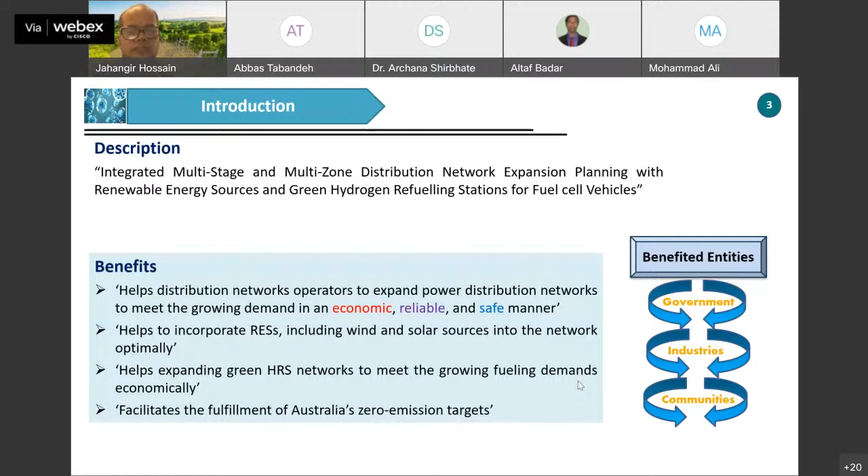For example, in Australia, after coal, the largest share of electricity comes from renewables. Among different types of renewables, wind and solar energy are mostly used in Australia for producing electricity. Therefore, it can be said that Australia is well placed to incorporate renewable energy sources like wind turbines and solar PV systems.

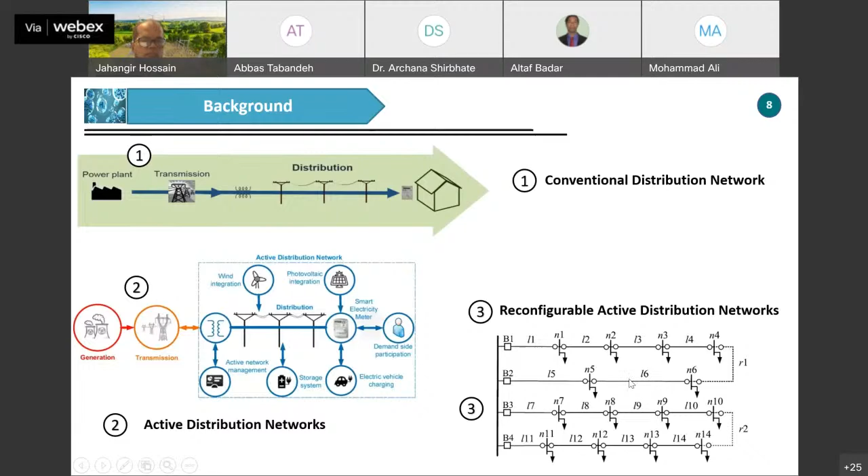Blue hydrogen also is produced by fossil fuels. However, an extra approach called carbon capture and storage technique is utilized to capture the produced carbon dioxide emissions. However, inherently, they are also not free of carbon dioxide emissions.

Recently, green hydrogen has gained much attention these days, and one of the most popular approaches of producing green hydrogen is utilization of water electrolyzers. In this process, which is called water electrolysis, electricity can be used to break the water into hydrogen and oxygen, and then the produced hydrogen can be used for a wide range of applications.

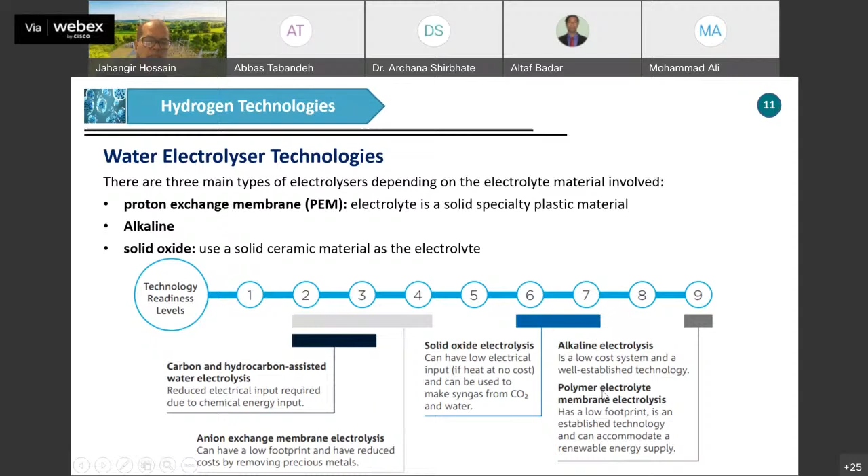If we want to compare these water electrolyzer technologies, alkaline electrolyzers and PEM electrolyzers, we can see here that when it comes to the advantages of alkaline electrolyzers, they have lower capital costs. In fact, they are more mature than PEM electrolyzers. In addition, they are well established.

And when it comes to their disadvantages, they have a larger footprint. Moreover, they have a low pressure hydrogen product.

However, PEM, which has gained much more attention these days in comparison with alkaline electrolyzers, has more advantages because they are very small, flexible, and modular. Moreover, their faster dynamic response can enable them to easily be connected to renewable energy sources. They have higher current density as well as higher purity hydrogen. The only problem is related to their higher capital costs. However, I think with the passage of time, they can mature and their capital costs can decrease.

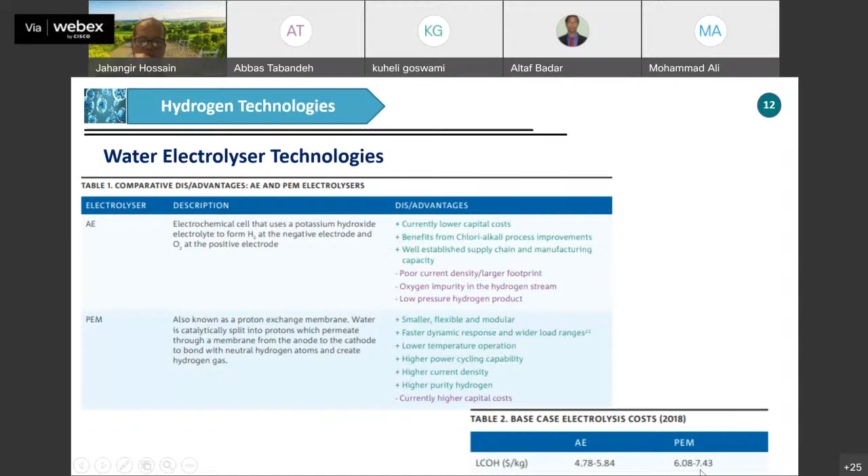In this table, you can see the levelized cost of hydrogen which is produced by these two technologies. You can see that the levelized cost of hydrogen is between 4.78 to 5.84 per kilogram of hydrogen. However, regarding the PEM, its levelized cost is between 6 to 7.50 per kilogram of hydrogen.

After considering the hydrogen production technologies, specifically the water electrolyzer technologies, we need to consider hydrogen storage technologies because they are required to be installed in the system in order to store the produced hydrogen, and then it can be used later during the day. For example, we can produce hydrogen during midnight when the electricity price is very low, and then store it in the hydrogen storage systems. And then during the day, when the demand for hydrogen energy is very high, we can use it.

There are different types of mature technologies related to hydrogen storage. The first one is pressurized hydrogen storage, and it is considered the most common hydrogen storage, and it is used mostly in the network. However, unfortunately, it has lower density, and it needs to be liquefied, or it needs to be pressurized more and more, and it can lead to some extra cost.

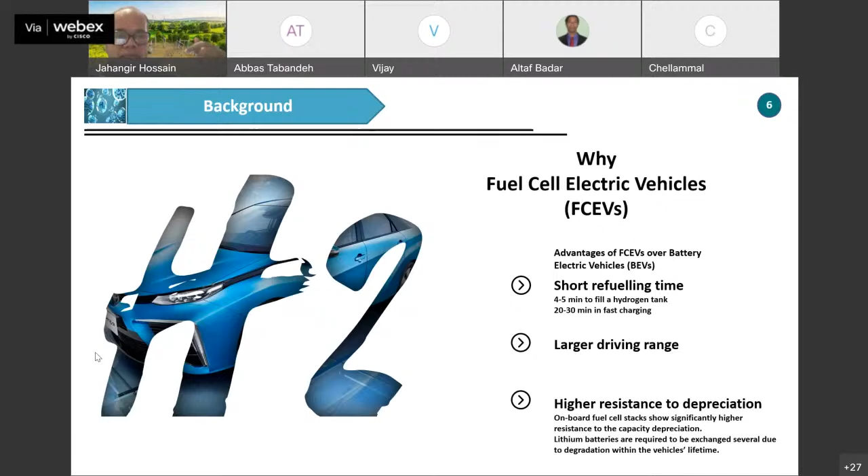And as Abbas mentioned, hydrogen is not only stored in gaseous form. We can store it in other forms as well. And of course then we can transport and use it for many other applications in different countries. So this is not only gas, but it could be in other forms as well. Okay. Yes, sir. Got it.

So it could be stored like a liquid and other forms. And the material carriers that Abbas already mentioned, like ammonia, that is one of them. Yes, sir. Got it, sir. Thank you.

Hello, Professor Jahangir. But the cathode or anode material, which is made from platinum, is also very costly. It is increasing the cost. Do we have any progress? Are other materials coming?

Well, I think you're right that anode and cathode are costly, but even the catalyst that is used for the fuel cell is much costlier than the material that we use for the anode and cathode. So that is one of the reasons that the price is high. That's why this is not that popular.

But as I say, when a huge amount of hydrogen energy is being used, the price will go down significantly. Some studies have already been done, for example in Europe, and they have shown that if they have 40 gigawatts, the hydrogen price per kilogram would be close to $1.

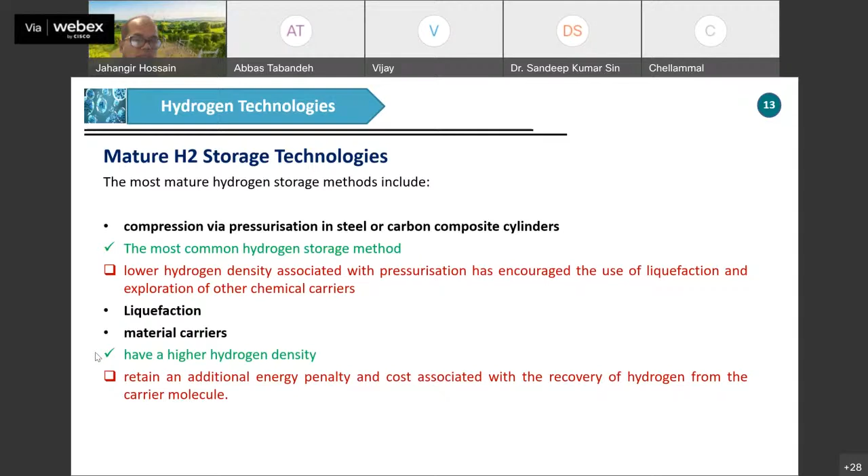Here we talked about different methods of hydrogen storage, which were compression, liquefaction, and material carriers. Regarding compression, there are different technologies which can be used. As you can see, low pressure tanks or pressurized tanks, underground storage, or line packing are different types of technology that can be used, and each of them has their own pros and cons. For example, low pressure tanks are more mature than the other ones. However, their only drawback could be that they have poor energy density.

Regarding the pressurized tanks, if we want to compress the low pressure hydrogen, we need to use, for example, some cascade compressors in different stages in order to reach our intended pressure. However, again, their energy density is also low, although they are established technologies.

However, underground storage can hold a high volume of hydrogen at lower pressure and cost. However, the only problem is that we need a specific geographical environment and a space for them, and it cannot be applicable in every place.

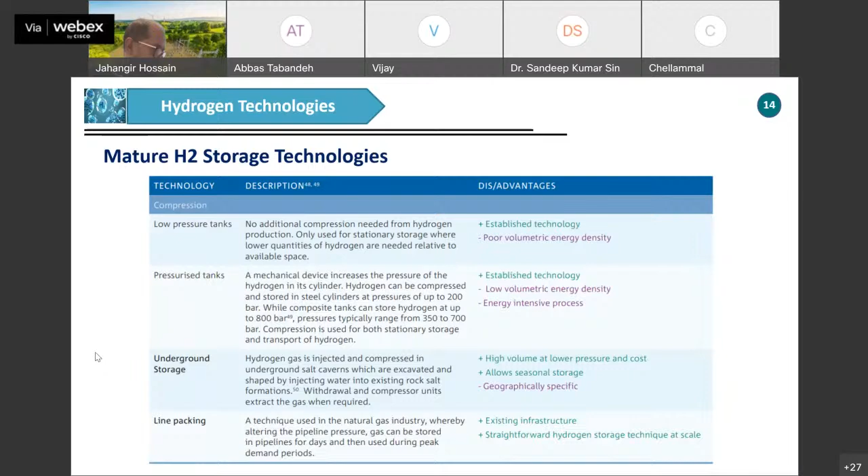And when liquid hydrogen is stored in these types of tanks, in fact, the main problem is that they can experience loss of energy, and some liquid hydrogen may be evaporated, specifically during transportation and something like this.

And the material based one, as I said, is ammonia, and you know, hydrogen first is converted to ammonia through the Haber-Bosch process, and then it can be easily transported to other places. Especially, they are more convenient for exporting to other countries

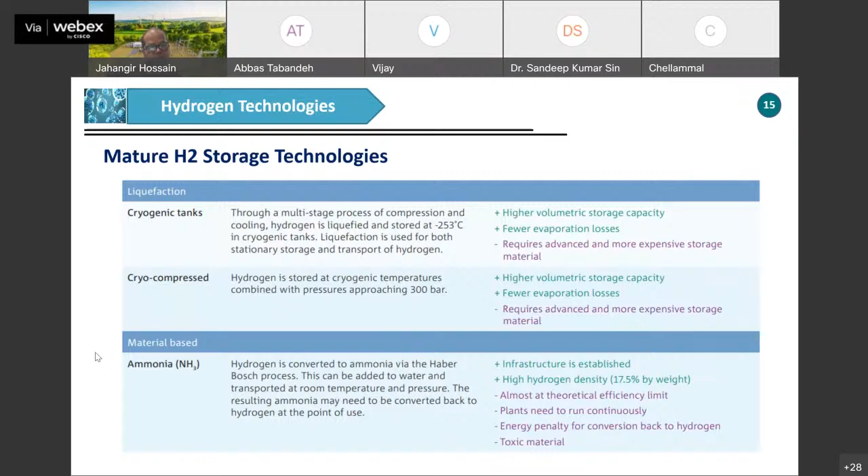Today the technology is going toward emerging hydrogen storage systems, and one of the new and emerging hydrogen storage technologies is metal hydrides. In metal hydrides, hydrogen is bonded to the metal alloy, and it can be stored in these metal hydride systems.

And one of the first products which have used metal hydrides for hydrogen storage is the Lavo product, and the Lavo product is suitable for small scale applications, specifically for residential houses as well as other commercial or business users. You can see here that they can be easily installed in houses or businesses, and they can be connected to renewable energy sources, specifically solar PV panels.

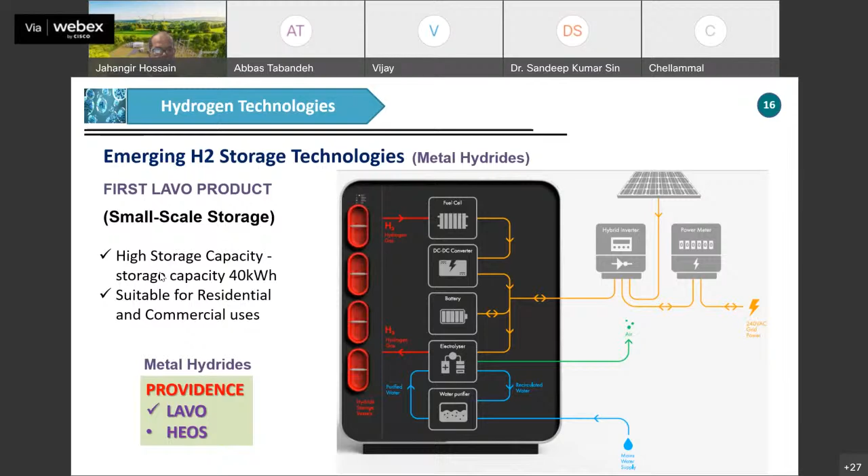This system also has high storage capacity, equal to 40 kilowatt hours. Also, this company is recently working to present a new product suitable for large scale hydrogen storage applications. This product is called HEOS, hydrogen energy operating system. And this system includes a green hydrogen generator. It consists of electrolyzer, storage, and fuel cells.

And they are really beneficial for large scale applications, specifically at utility and community scales, because they are able to store much more energy, equivalent to 13 megawatt hours. And also they can be easily connected to on-site wind farms or solar farms. Again, in this product, the technology of metal hydride is used.

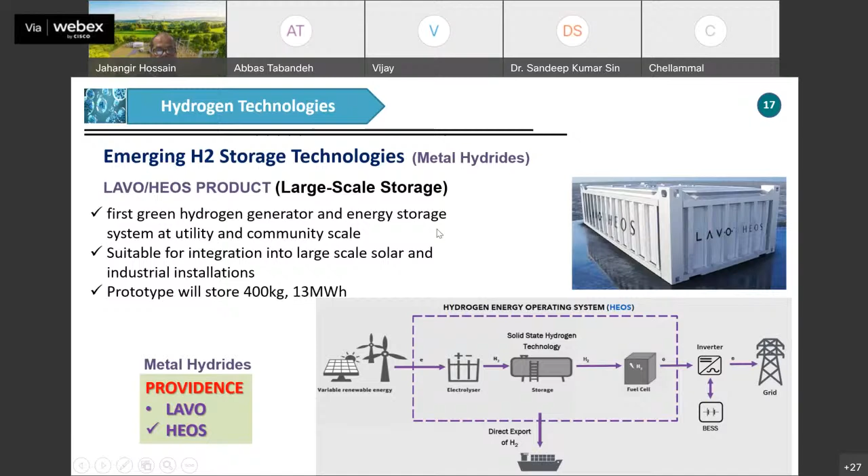When it comes to the challenges and gaps of this research work, first of all, we have the distribution electricity network, and on the other hand, we have the transport sector, which contains fuel cell electric vehicles. Therefore, as the fuel cell electric vehicle market develops, with increasing fuel demands, we may have some new challenges to produce hydrogen and supply the fuel cell electric vehicles.

Also, in the electricity network, especially in Australia, during the day we have additional renewable power generation, and it can be challenging. However, the solution is that we can use this extra renewable generation for producing hydrogen. And one application of this hydrogen can be mobility, or fuel cell electric vehicles. To support fuel cell electric vehicle owners, we need to develop green hydrogen refueling stations in different places of the transport sector.

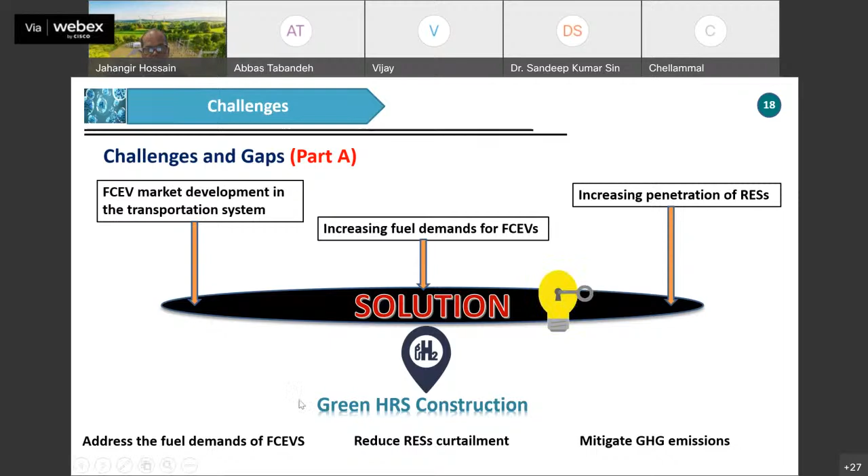The other challenges relate to the electricity network. When we want to produce green hydrogen, we need to implement renewable energy sources which are located in the electricity network. Also, over time, we will experience growing power demand as a result of increasing population or other reasons.

We may also experience growing hydrogen fueling demand as it becomes more established. In order to deal with these challenges, we need to appropriately find the optimal site, size, and timing during the decades for installation of hydrogen refueling stations or new renewable energy sources in the system. We need to coordinate the operation and installation of these technologies together.

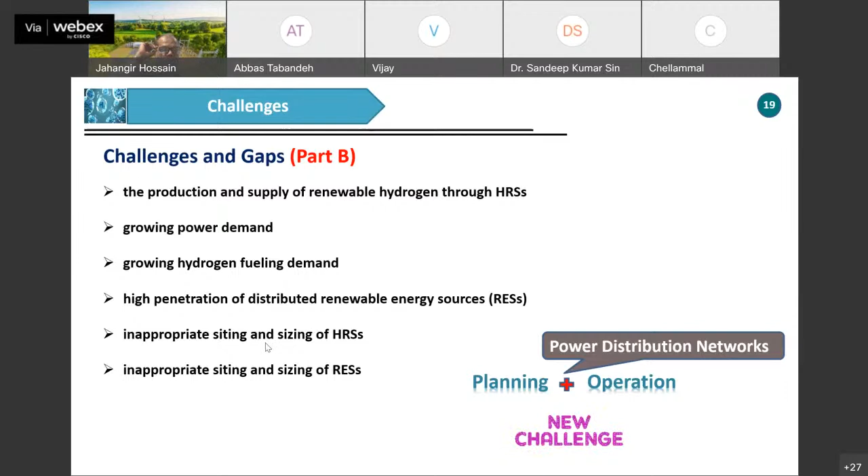Therefore, in this research work, we present a new multi-stage and multi-zone expansion planning model for distribution systems. We try to find the optimal size and optimal location for renewable energy sources used to supply electricity demands, and other groups used to supply hydrogen refueling stations for producing hydrogen. We have supposed that hydrogen refueling stations are able to produce and supply their needed hydrogen distributedly.

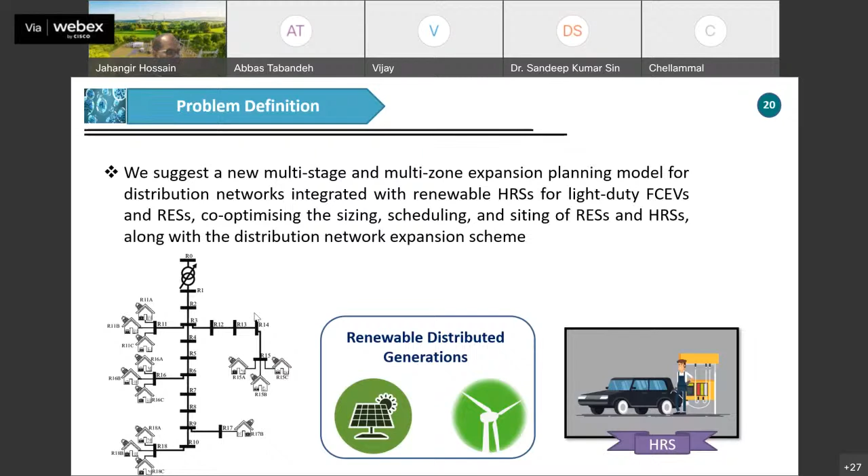In this problem, we have three separate main aims. One aim is related to the distribution network asset. Another is related to the green hydrogen refueling station, and another is related to renewable energy sources, including wind farms and solar farms.

When it comes to distribution network assets, we try to find the optimal location, size, and timing for construction, replacement, or reinforcement of distribution network assets. Assets in the distribution network include feeder sections or substations, and feeder sections can be categorized into three different categories.

Some feeder sections existed previously and are irreplaceable. On the other hand, another group which exists in the network can be replaced by new feeder sections with higher capacity, for example. There are also other groups of feeder sections which are candidates for construction and are ready to be installed in the network.

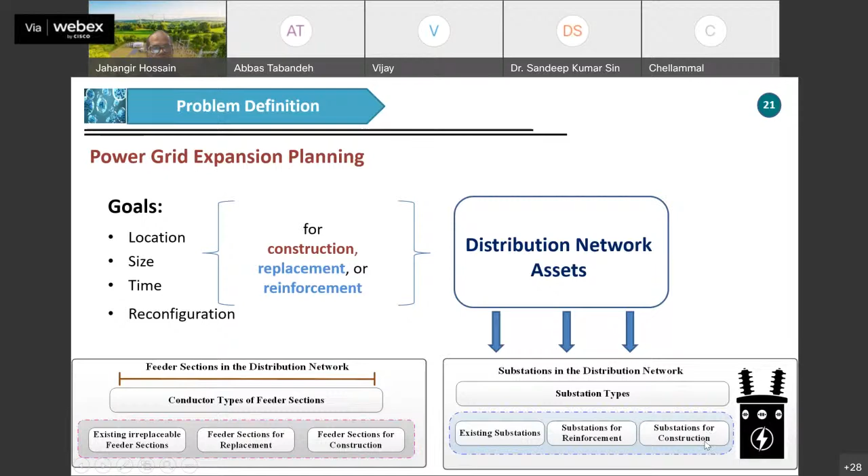It is similar for substations: we have existing substations, substations which can be reinforced to increase their capacity, as well as other substations which are candidates for construction in the electricity network.

Regarding the green hydrogen refueling station, we need to find the optimal location, meaning we find the best electricity nodes for installing the hydrogen refueling station. We also try to find the optimal size and the timing for construction of refueling stations.

Moreover, in order to address fuel cell electric vehicle fueling needs, we need to divide the network. The electricity network, intertwined with the transport network, can be divided into multiple zones. Then, regarding the fueling requirement of each zone, we want to find the optimal number of hydrogen refueling stations, their size and location, which can address the fueling demands of fuel cell electric vehicles.

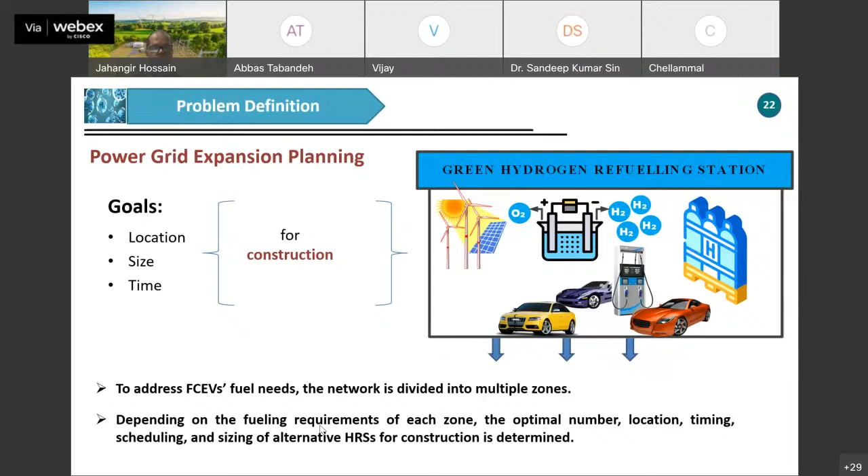In addition, we need to coordinate finding the optimal location, sizing, and timing for construction of renewable energy sources, including wind turbines and wind farms.

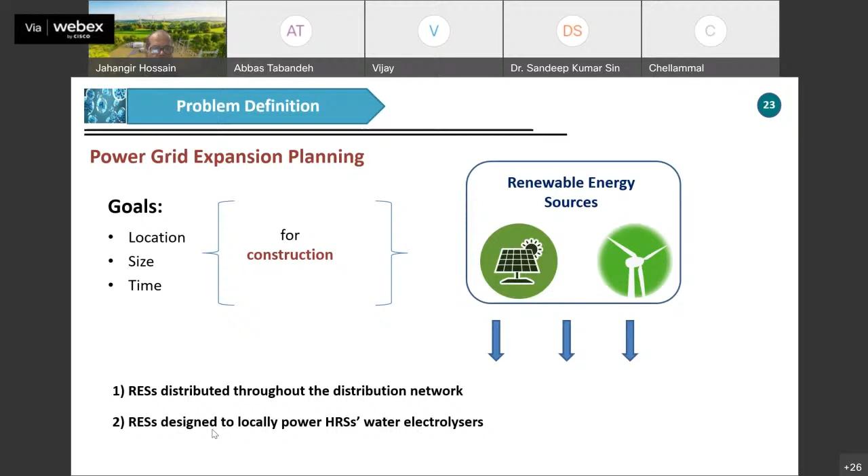We have two groups of renewable energy sources. The first group are those distributed throughout the distribution network, and another group are those designed to locally supply the electricity demand of hydrogen refueling station production units. The production unit means they can use water electrolyzers for producing their hydrogen locally.

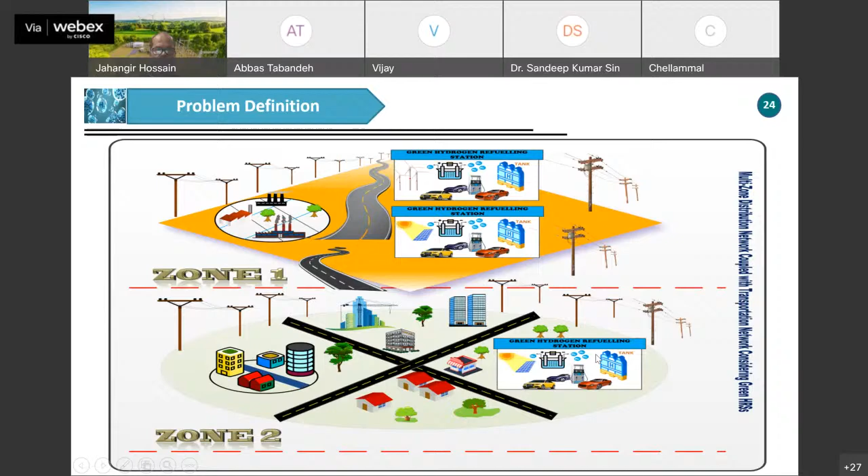If we want to define the problem, this problem includes the objective function. In this objective function, the distribution system operator tries to minimize the total cost of investment, energy production, maintenance costs, as well as emissions costs, which are incurred over a planning period. For example, a planning period may be the next 20 years, or the next 4 years. It can be short-term, long-term, or mid-term.

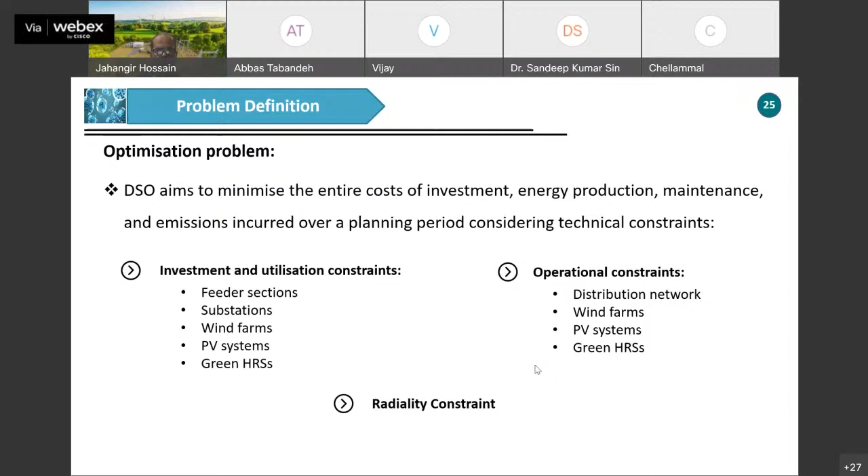However, this objective function is subject to different types of constraints, and they can be categorized into three groups: investment and utilization constraints, which include constraints related to feeder sections, substations, wind farms, PV systems, and green hydrogen refueling stations; operational constraints related to the electricity network, wind farms, PV systems, and hydrogen refueling stations; and the radiality constraint, which we need to meet in order to prevent loops in the distribution network.

Here we have analyzed two different case studies. The first case study is a small electricity network. It includes 6 nodes, and it is a 22 kV network. This electricity network is divided into 2 zones: Zone 1, which consists of these nodes, and Zone 2, which consists of nodes 1, 3, and 4. Here we have 2 substations, as you can see.

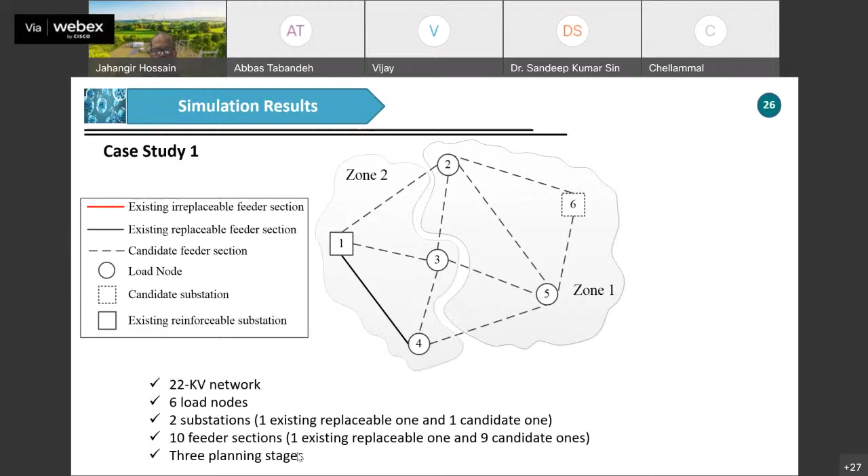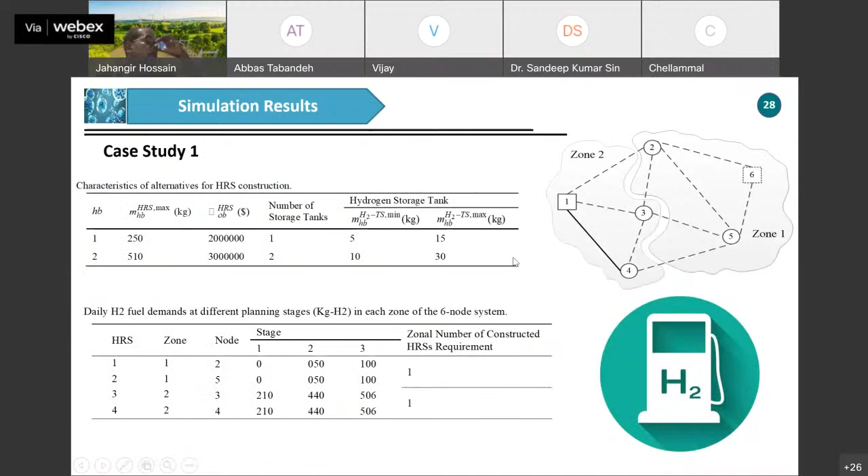Here we need to install a new wind farm with the capacity of 2 megawatt at node 2, and also we were required to install a hydrogen refueling station of type 2, which has a daily hydrogen production capacity of 510 kilogram. In the vicinity of this hydrogen refueling station, we were required to install a solar farm with the capacity of 2 megawatt to power the water electrolyzers for producing hydrogen. Moreover, two feeder sections were required to be constructed. The type 1 with the lowest capacity was required, and its capacity was 3.4 MVA.

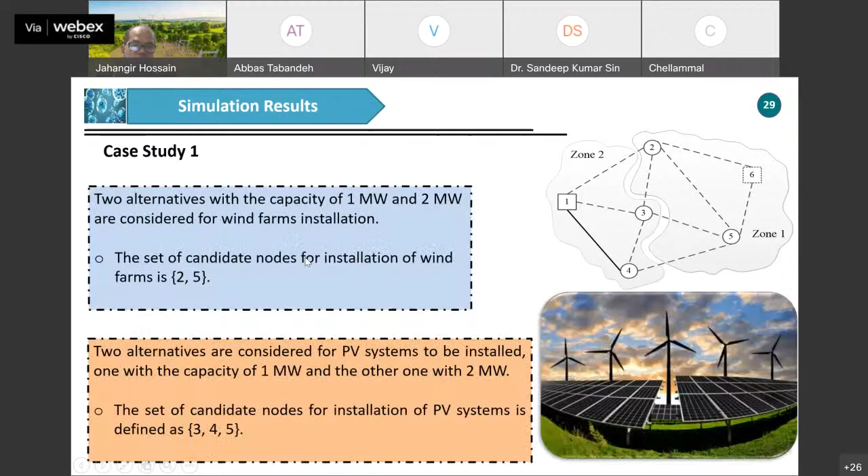However, regarding stage 2, we can see that another hydrogen refueling station was required to be installed at node 5, and a wind farm with the capacity of 2 megawatt was required to power this hydrogen refueling station. The red one represents the feeder section between node 1 and 4, which used conductor type 1; this line was reinforced and replaced by conductor type number 3, which has a higher capacity of 8.5 MVA. Also, we can see here that the first substation was reinforced and its capacity was increased.

Stage 3 has a different topology compared with stage 1 and 2. As I said previously, we can see the reconfiguration of the distribution network system. The line between node 5 and 2, which existed at stage 2, was disconnected, and a new line was constructed between node 6 and 2, and a new substation was required to be constructed to support the electricity.

Here also shows the results related to hydrogen production for each hydrogen refueling station. We had 2 hydrogen refueling stations, at node 5 and node 4. This result is related to node 4, and we can see that the pattern of hydrogen production shows an erratic pattern. The main reason is that the hydrogen is produced, and again it's not produced for a while, and the main reason is the utilization of hydrogen storage tanks.

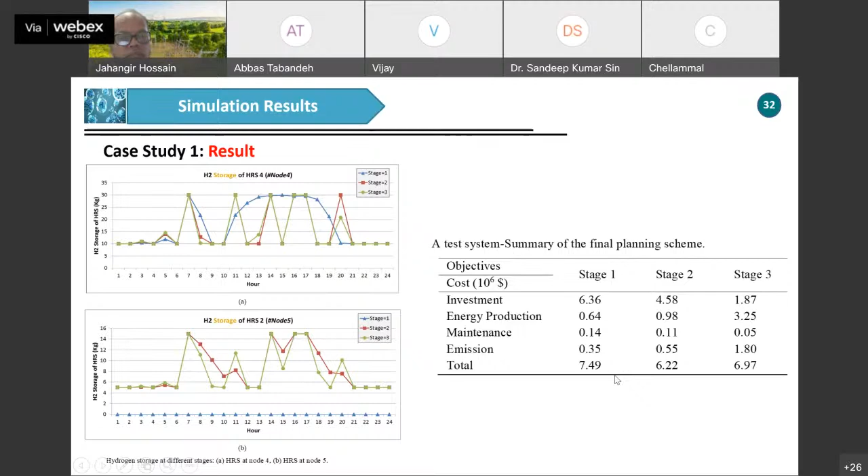Here in the table, we can see our objective functions, which include different parts: investment costs, energy production costs, maintenance costs, and emission costs. Here you can see the total cost at each stage, and at each stage we need to invest different amounts of money to fulfill our hydrogen demand as well as electricity demands.

This one is also a second case study, which... sorry for the interruption. So you already have shown some results. Yes, this is just like another case study.

Before that, probably I'm not sure all the attendees have understood what Abbas is trying to convey. So the things that Abbas has done here, for example, let's say if you would like to have a hydrogen refueling station, or some load that you would like to supply through hydrogen, then you need to actually have further infrastructure for your electricity network, because you will be producing green hydrogen mainly from solar and wind energy, but sometimes you can also buy energy from the power grid as well. So if you would like to do that, that would be like additional demand coming to your power network, so that's why you need additional infrastructure to do that.

And here, what Abbas has done: he first approximated or quantified what would be the demand for that particular application, and based on that he developed some optimization algorithm to find out what would be the optimal sizes as well as operation of all the devices connected to that particular system. So having said that, I'll open the floor for any questions or comments regarding this particular planning and operation study.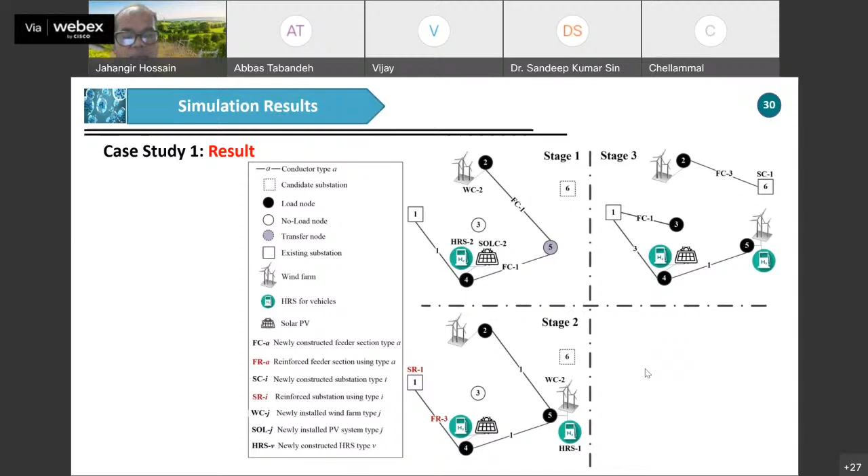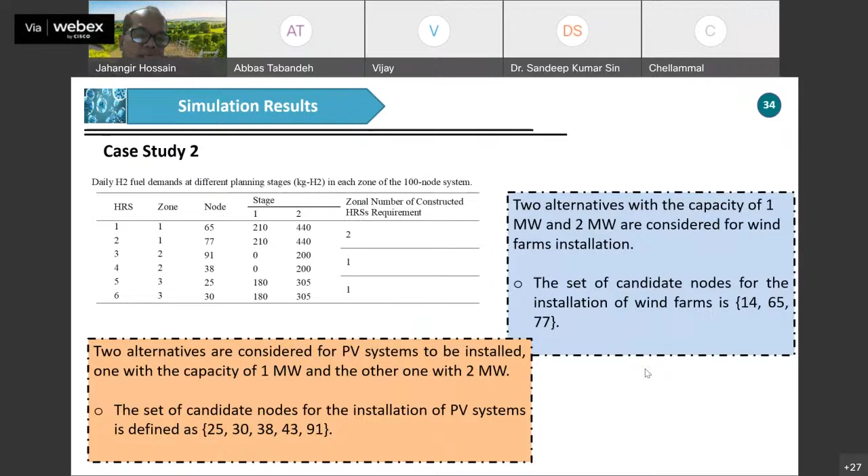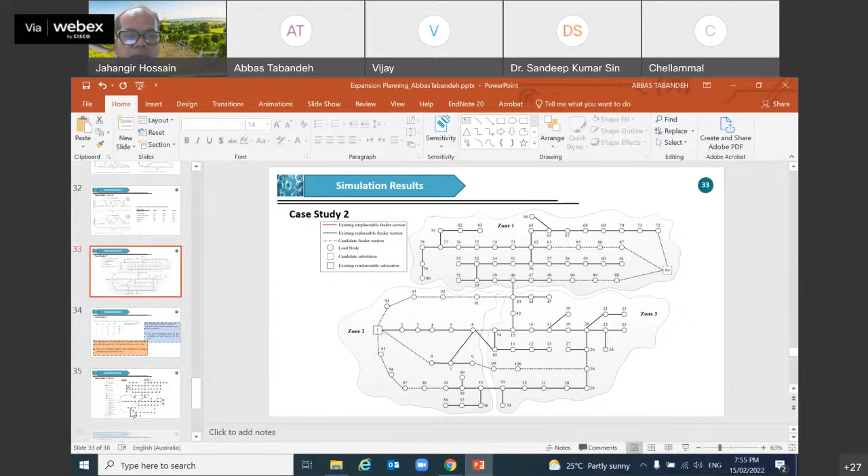Anyway, Abbas, your second application just gives the same result, using the Australian real network, so I don't think we need to repeat it again. I have already sent the slide, so if someone is interested, they can have a look. But the next one is more like using a real network in Australia, and the first one is like an open source system used in the literature. So just for validation purposes, we have also implemented a network which represents some real system in New South Wales.

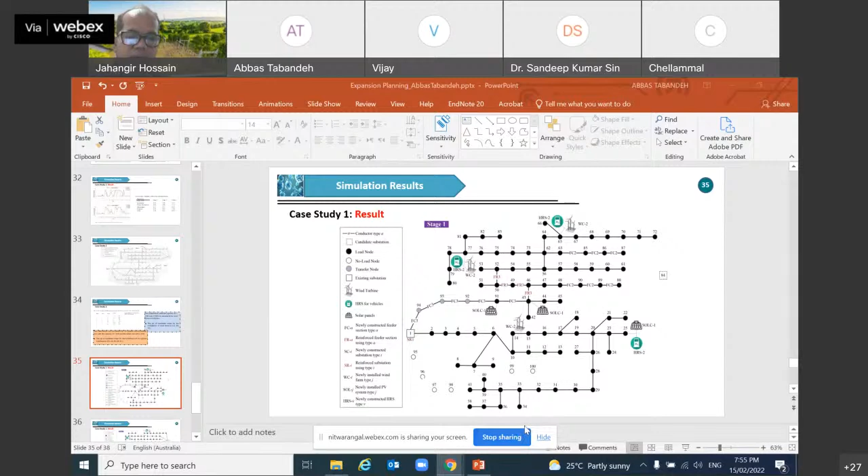So I'll just give you 5 minutes break, and then I'll have another 30 minutes. I'll go through some information, considering different perspectives, some applications, although Abbas did mention some applications, but I'll go through some other applications.

And as I said, we have done a simple feasibility study just to have a hydrogen hub at New South Wales with a few industries. For all the participants here, is anyone planning to work relevant to hydrogen technology or its application, or even doing a feasibility study?

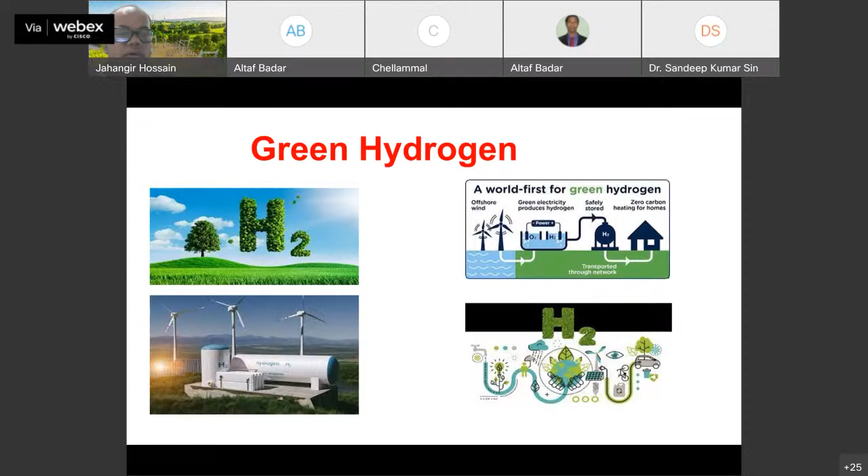Although green hydrogen is new, hydrogen itself is not new. If you think about the current market, about 55 million tons of hydrogen is actually produced each year. But most of it is produced from natural gas, which, as Abbas mentioned, could be either blue or gray hydrogen. If we capture, store and use the carbon, that's one type; the other, we don't capture the carbon and store it.

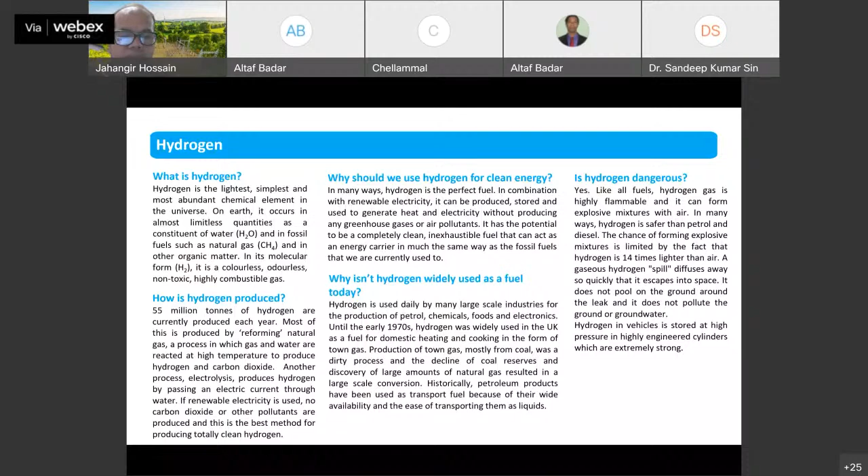So there are a number of reasons green hydrogen might be popular in coming years, and one of them is that most countries, including Australia as well as India, have promised they will go carbon neutral - Australia by 2050, and if I remember, India has promised by 2060. Is that right? Yeah, I think so, that's also my understanding. It's 2060. And to achieve that target, hydrogen can play an important role.

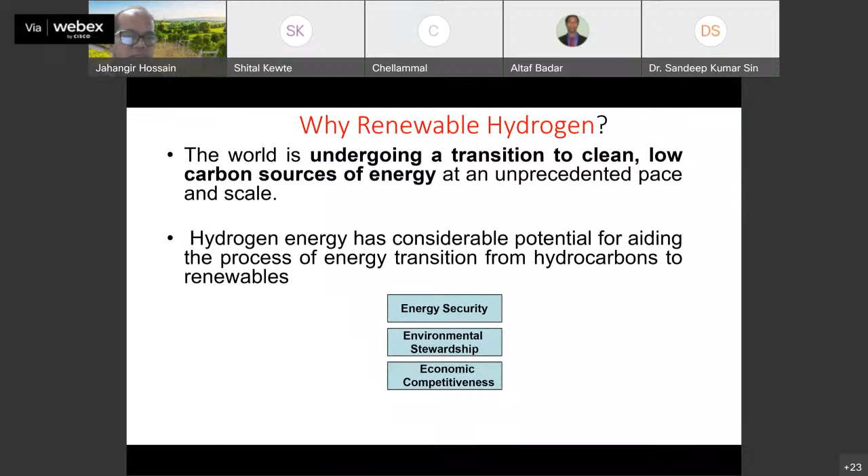The applications for which hydrogen might be popular are those where you cannot use direct electrification. In cases where you can use direct electrification, I don't think hydrogen will be as popular, but there are still many cases where you cannot apply direct electrification for all energy applications. That's why hydrogen has got great potential, and it would be an important candidate to achieve the net zero target.

So far, from an Australian perspective, the Australian government has done some study and predicted that within 30 years, the hydrogen market would be approximately $50 billion in Australia. And that will help not only Australia, but the world, to achieve deep decarbonization.

But if you ask me about the current situation, this is a long way from producing cheaper green hydrogen that can compete with fossil fuel. But by 2040, not only in Australia but in many other countries, they predict almost an 83% fall in electrolyzer cost, and that will help reduce the per kg hydrogen cost significantly.

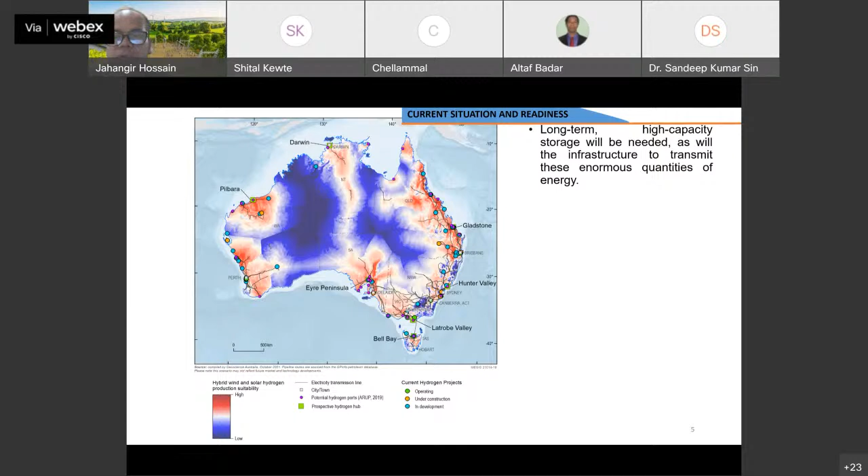And this is the hydrogen map for Australia, and these are showing some of the potential locations in different parts of Australia. And here in New South Wales, we have got some potential locations where we'll be having a hydrogen hub. So you can see that, Australia-wide, the Australian government has already targeted many potential locations where there will be hydrogen hubs.

So in the longer term, as I say, high capacity storage will be needed. And to store as well as transmit, we need more massive technology. And as I mentioned, so far there are a number of research projects going on worldwide. And I believe by 2030, 2040, we'll have massive technology for hydrogen production, storage, as well as transportation.

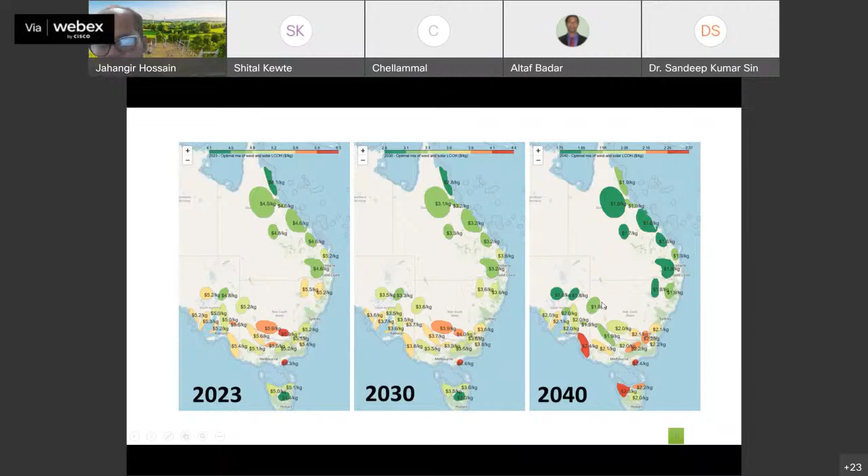And again, this is the roadmap for Australia for hydrogen, starting from 2023 to 2040. As I say, I already showed those particular locations. They have also predicted the hydrogen price in different locations, and as you can see, with progressive time, for all the locations, the hydrogen price will be reduced significantly. The same thing has been done for Europe, USA, China, and other countries as well.

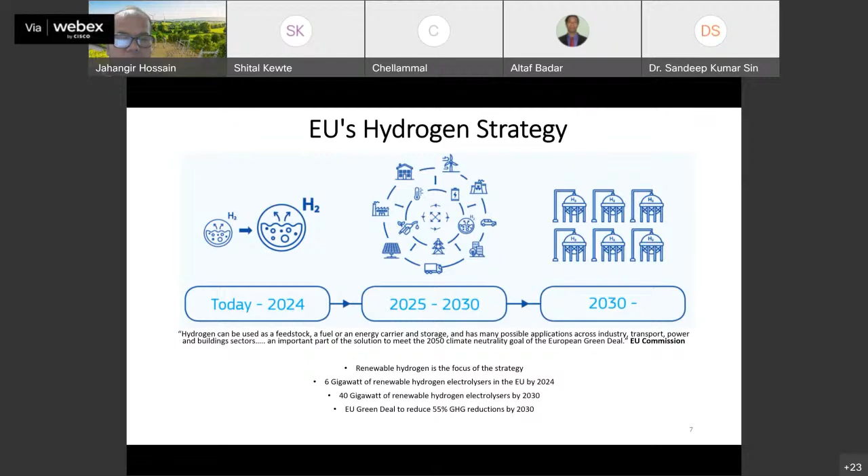So for Europe, they have predicted that by 2024, they will be having 6 gigawatts of renewable hydrogen electrolyzers and 40 gigawatts of renewable hydrogen electrolyzers by 2030. So there will be an exponential increase in Europe as well, and that will definitely help to reduce their greenhouse gas emissions by more than 50%.

In terms of India, I think all of you are familiar with TERI, the Energy and Resources Institute, I think that's in Delhi. They have done some studies on hydrogen, and from their findings, the current price in India is $5 to $6 per kg, which is much higher than in Australia now. So with this price, it is unlikely that it would be possible to utilize hydrogen in different sectors, for example steel, fertilizer, or even long range shipping fuel and EV applications as well.

Now, for green hydrogen to be feasible in India, they mentioned that the price should at least come down to $2 per kilogram. But having said that, their final target is to bring down the price to $1 per kg. But as I said, this reduction is not possible now, and it will not be possible without manufacturing electrolyzers on a broader scale in India, not importing from other countries.

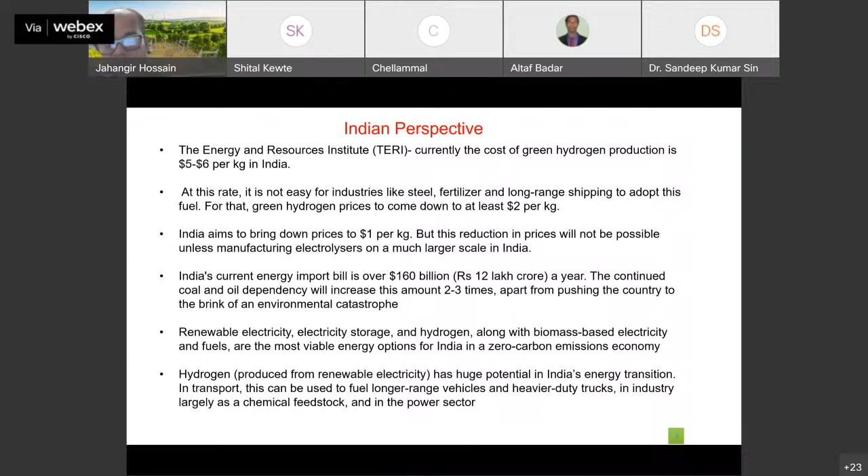Sorry for that issue here.

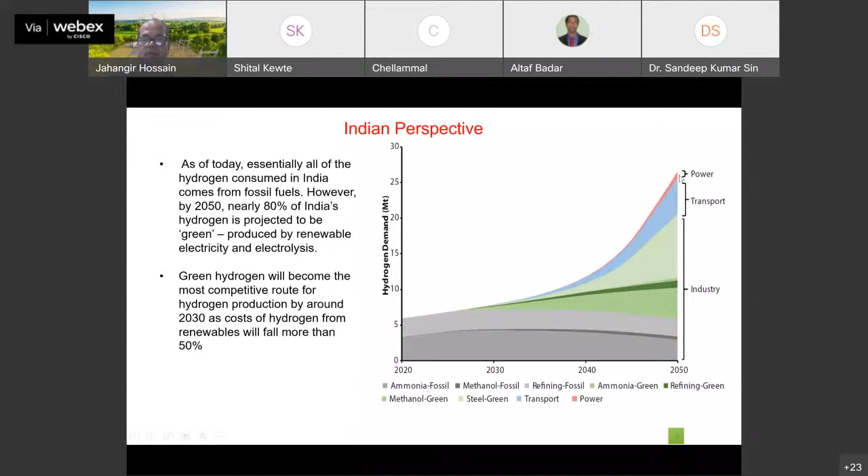And you can see that after 2040, there will be a massive growth in India. So in terms of the pricing, comparing with solar, natural gas, coal, and grid electricity, you can see that off-grid solar also would be very comparable to natural gas as well as coal.

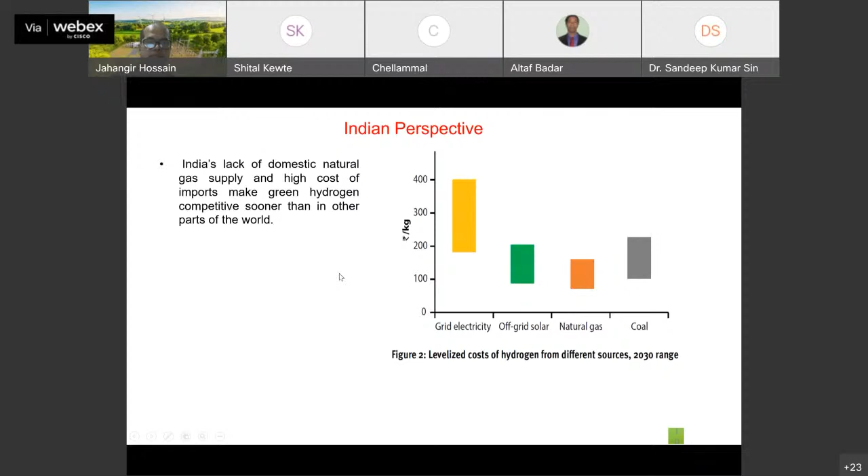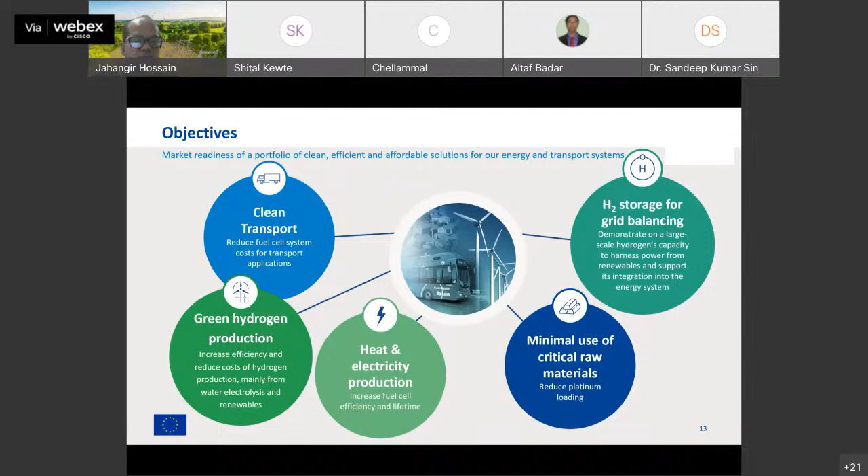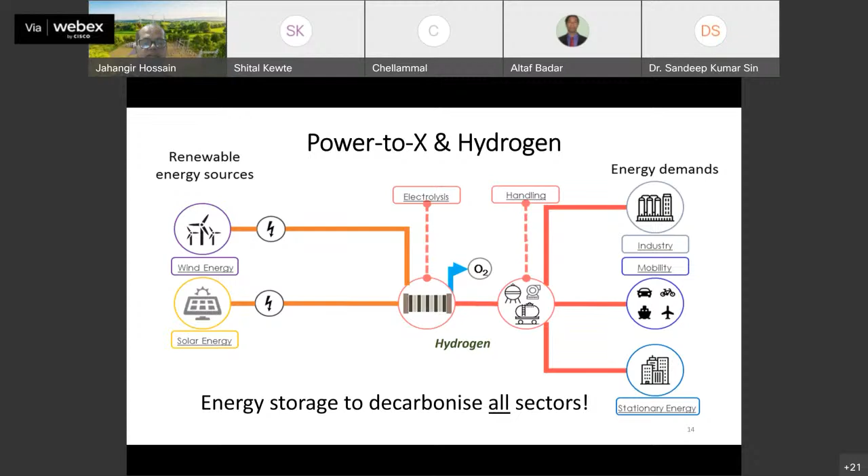And here it just mentions some of the applications of power-to-X. For example, one of them would be decarbonizing the heavy industry. And to do that, we could utilize those sources of energy to produce large-scale hydrogen through the electrolyzer. And then we could have hydrogen, which could be used for a combined heat and power plant in different industry uses, and also for ammonia export to different countries, steel industry, cement industry. It could be also for synthetic industry. And here are some of the examples.

It could be, again, chemical precursor, industry feedstock, power generation, aviation fuel, and other applications could be some decentralized applications. For example, if you have an off-grid, small remote or microgrid system, you could have a decentralized hydrogen refueling station. You could also have standalone ammonia production for greenhouses, or you can also have an on-site disinfection system. So these are some of the applications, but there could be many other applications as well.

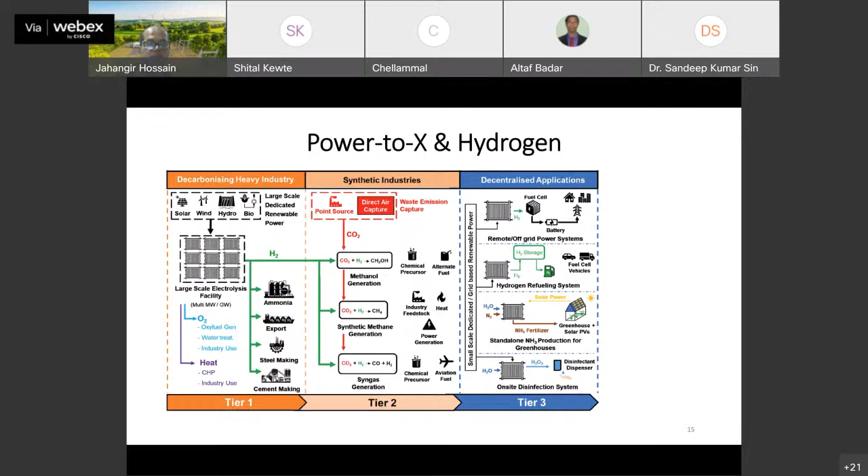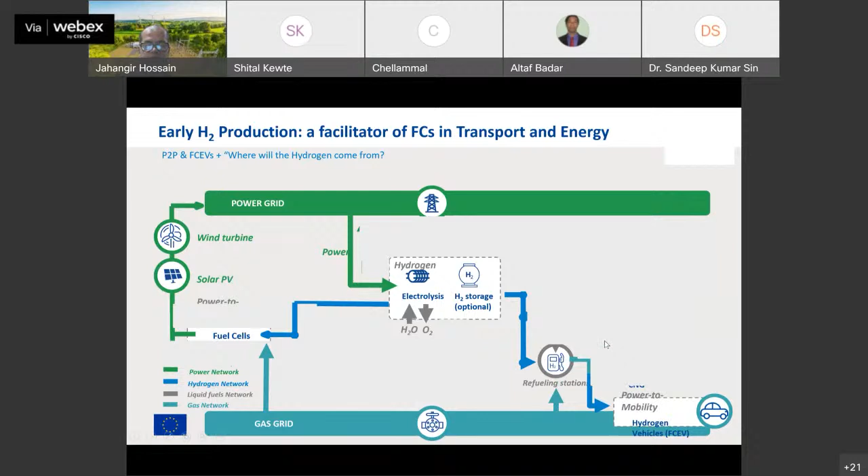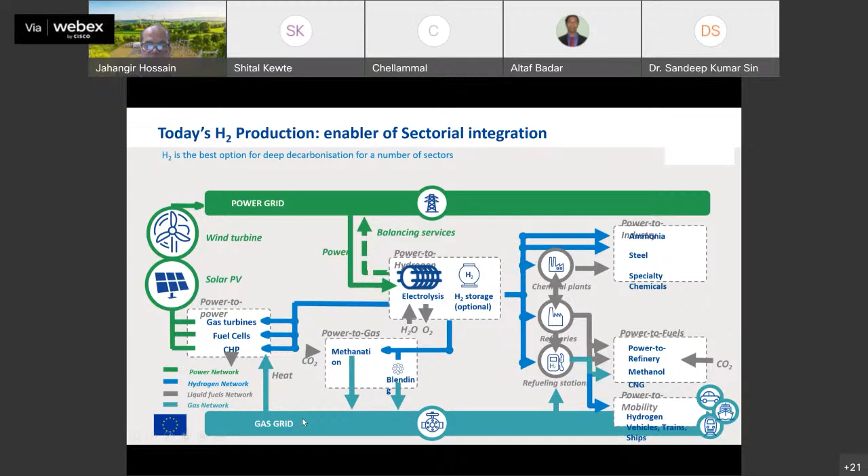So here again, I already mentioned that it could be for fuel cells in transport as well as energy. It could be other sectoral integration. And here some of the sectors I mentioned: steel industry, refinery, mobility, and it could be interconnected to the gas grid as well. It also could be utilized to green the steel industry, because that industry is now heavily producing greenhouse gas. It's a polluting industry, and to make that industry green, there are already a number of projects going on in Europe.

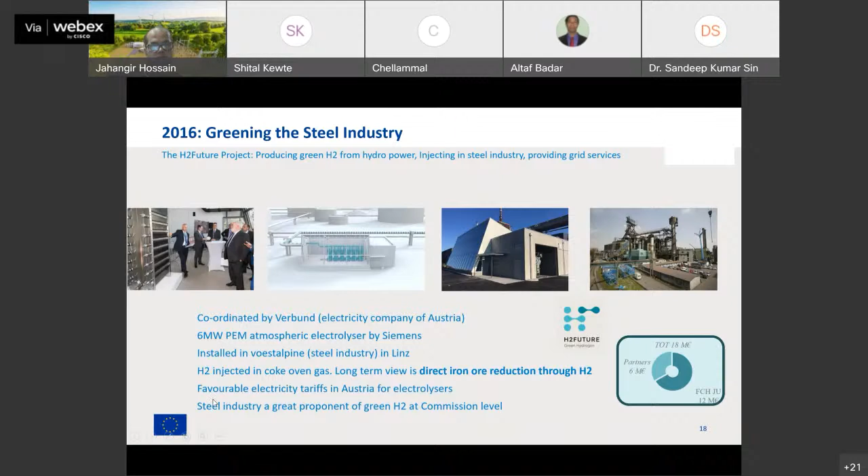Now, as I mentioned, there are different pathways to produce as well as store hydrogen. And here are mentioned some of them: producing hydrogen from nuclear energy. From nuclear energy, you can have heat, and then you can use that heat to split the water and have hydrogen. You could also have renewable energy sources. That Abbas already talked about in detail.

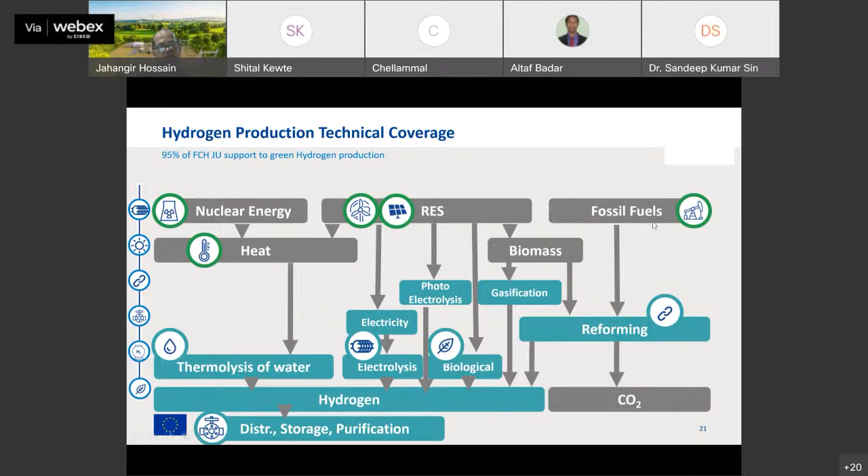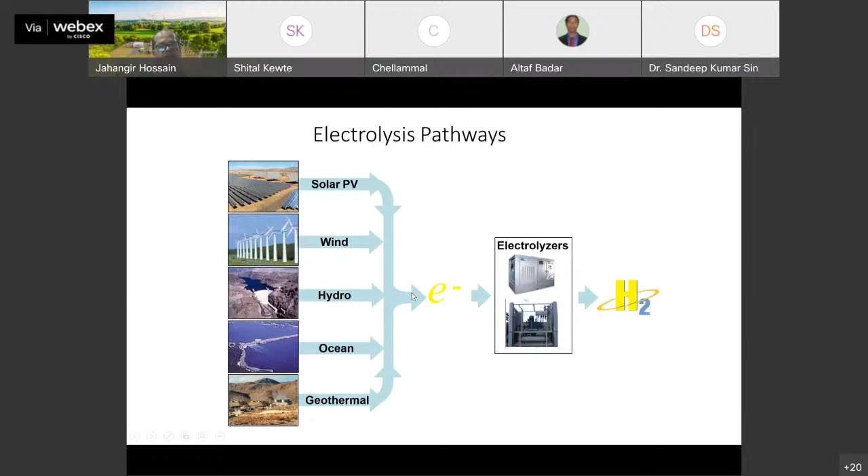You could also use biomass, and then gasification and reformation, and you could have hydrogen as well. And as I say, we already have hydrogen from fossil fuel as well. So again, these could be some of the sources where you could use an electrolyzer to produce hydrogen. For example, solar PV, wind, hydro, ocean energy, or geothermal. All of them are renewable energy sources. So you could use any of them as input energy, and then using an electrolyzer, you could produce hydrogen.

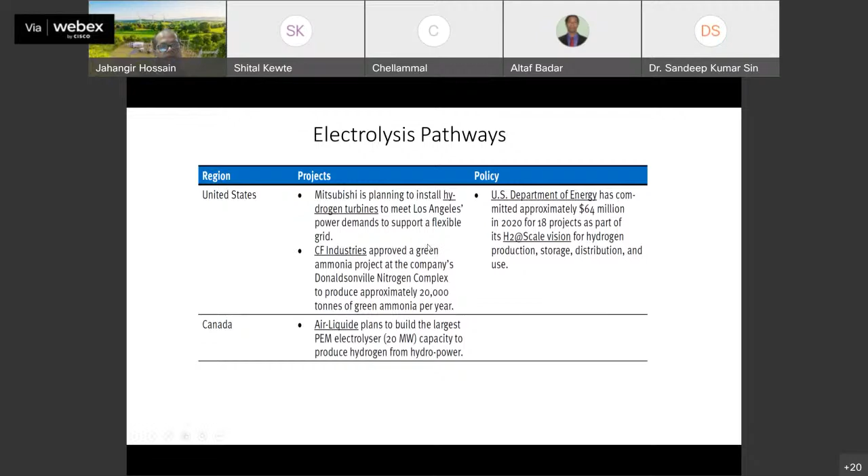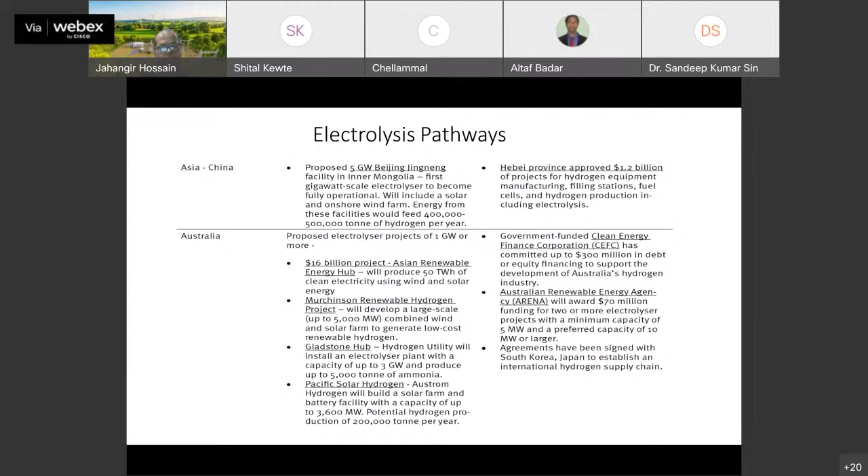And as I said, for electrolysis, there are a number of projects going on all around the world. As I said, in the United States, Canada, China, Australia, but also Japan, Korea, even in Saudi Arabia as well.

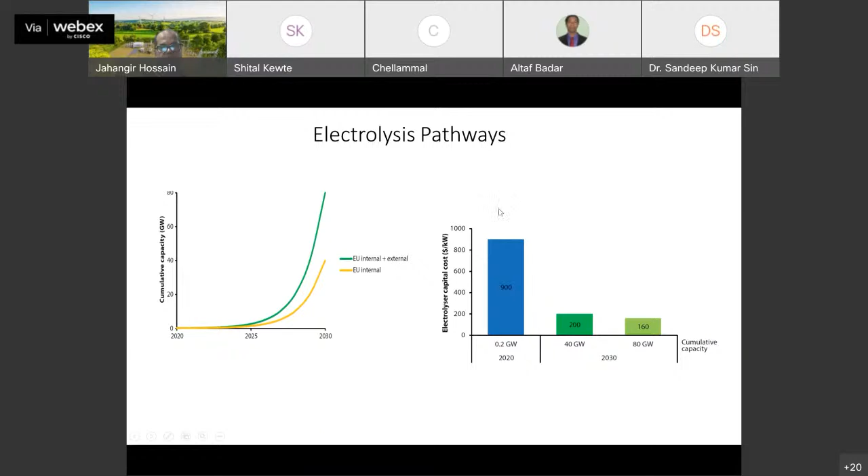So if you are using sunlight, but not using a photovoltaic system, there are also three other different ways that I already mentioned. Either using heat, directly capturing the sunlight using your solar thermal system. So you can have big glass that captures the heat, and it produces very high temperature, and you can use that temperature to split the water and produce hydrogen. You could also have nuclear energy that produces heat, and then you can produce the hydrogen.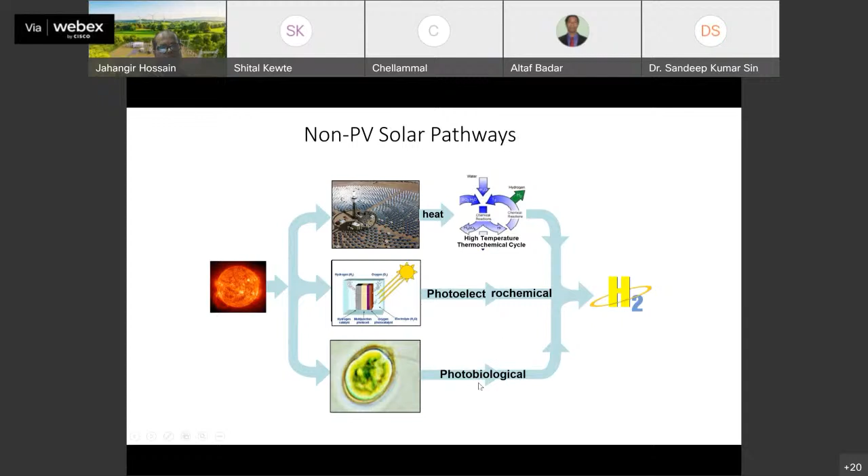Photo electrochemical: as I mentioned, there are some materials which can directly capture the sunlight, and then using anode and cathode internally, they can produce hydrogen. And then, as I mentioned, if you have microorganisms, through a photobiological process, they take the sunlight and produce hydrogen. But here the capacity and the rate of hydrogen will be very low compared to other cases.

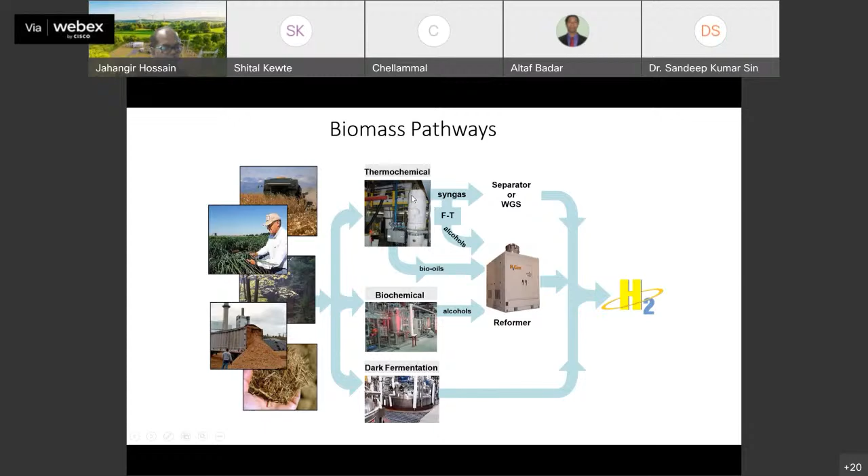As I said, biomass could be another potential source as well. And these are the three processes you can utilize to get it from biomass.

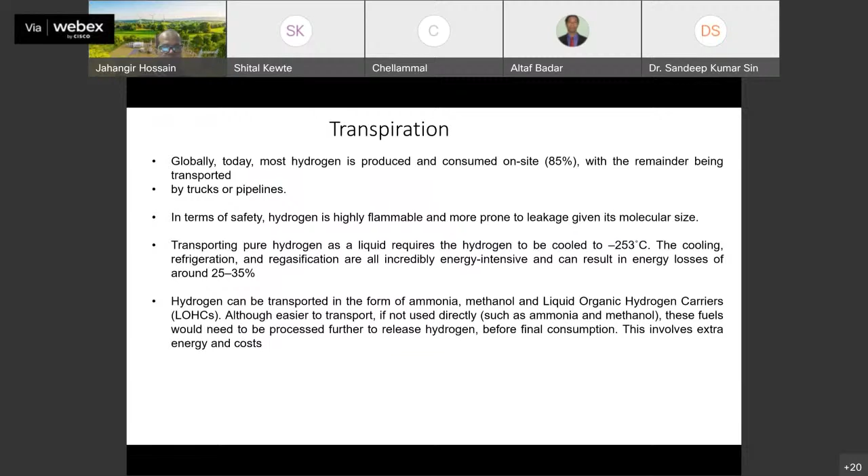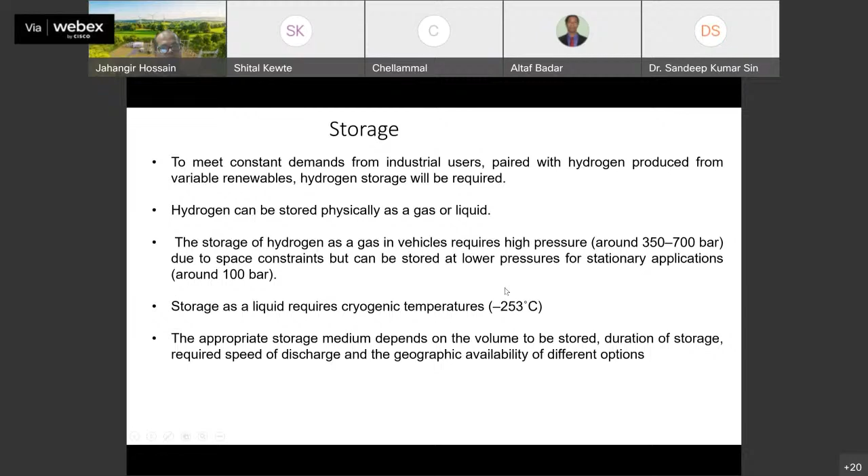That slide I'll just skip because I already mentioned that application for transportation. The storage of hydrogen, Abbas already talked about that, but here are mentioned some of the challenges. For example, if you want liquid hydrogen, your temperature should be minus 253 degrees centigrade, and that's quite challenging. The geological tank, all of that, Abbas already mentioned.

Next, although it's 8:30, I'll take another 5 minutes to go through that application. As I mentioned, we did a feasibility study for having a hydrogen hub at a place called Sydney Science Park, where there's huge demand potential. We considered potential applications like large office space, a super mall, restaurants, a school, and there'll also be an airport.

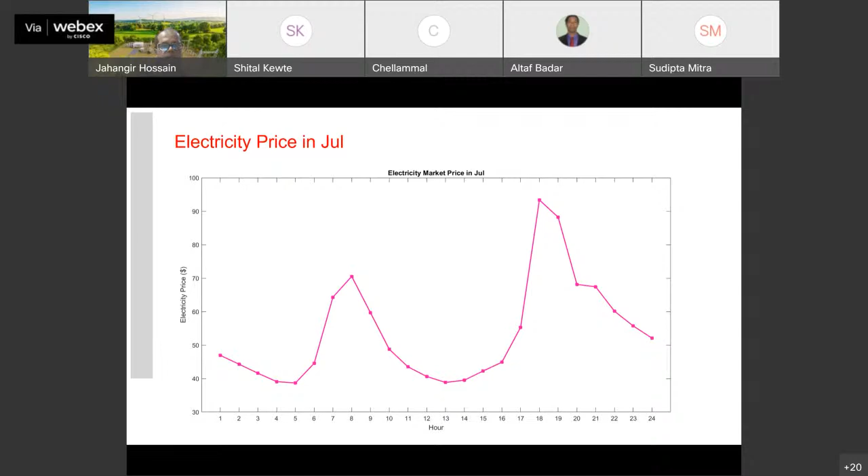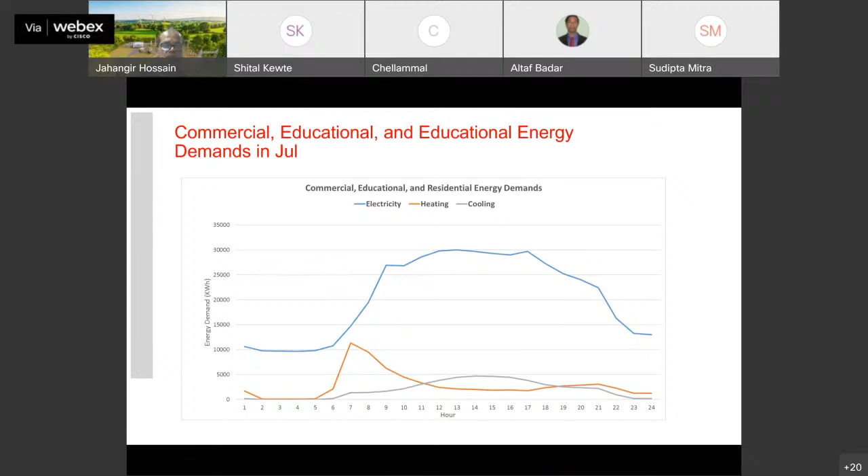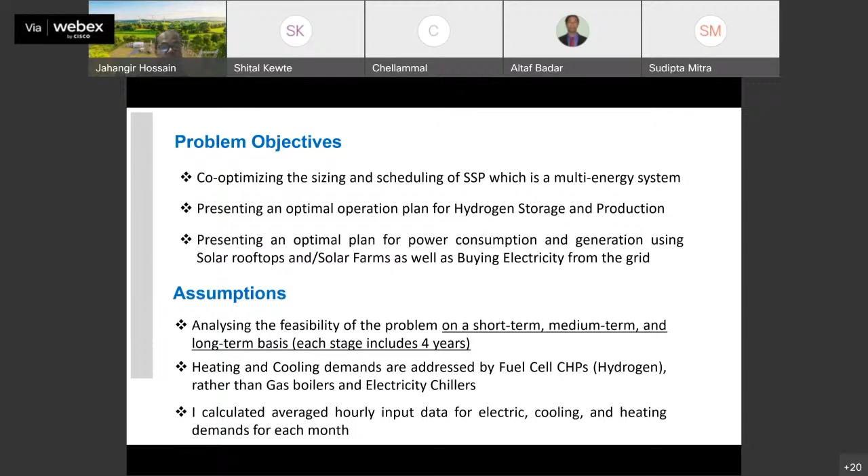Considering the current electricity price in that area, here is the electricity price for a particular day in a particular month. In the same month, we considered the potential demand for all the loads that will use hydrogen as their source of energy. We developed an optimization algorithm to find the new technology needed in that area, which will also have hydrogen storage, production capability, refueling stations, and many other applications.

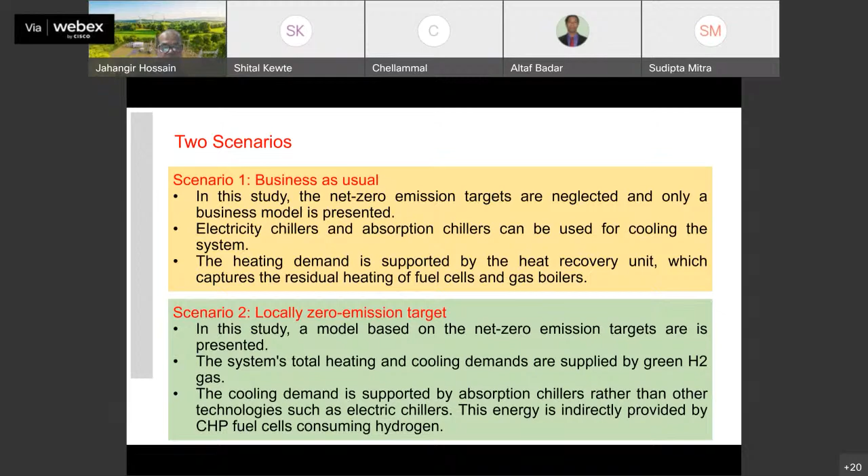We considered two cases: business as usual and a net zero path. For each, we looked at what sizes of different devices would be needed, what initial investment they might require, and what other associated costs there could be. This is the complete diagram for the system that we modeled, optimized, and simulated.

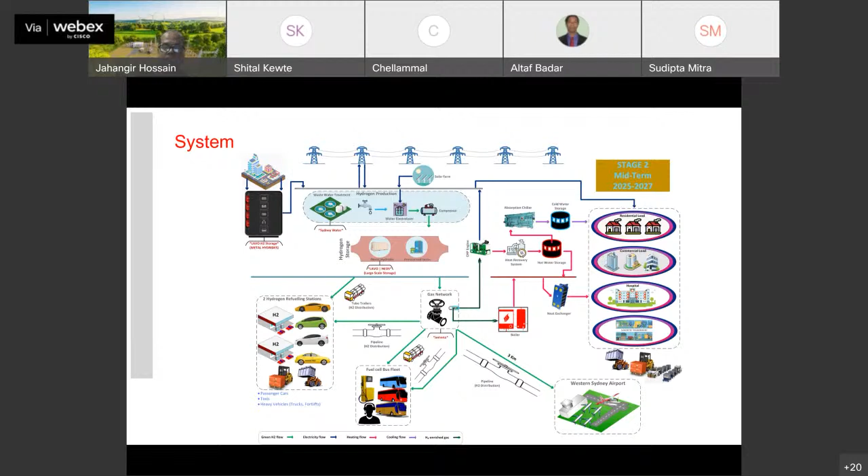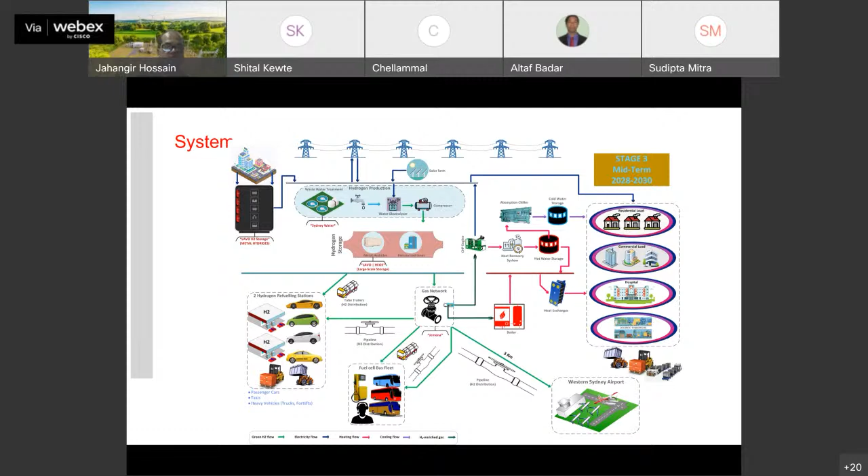We're showing three different terms: short term, medium term, and long term. For the short term, we looked at different opportunities for generation, storage, and demand side. We considered three different phases and estimated, modeled, and simulated three different cases considering different sources and mixes of generation, storage, and uses.

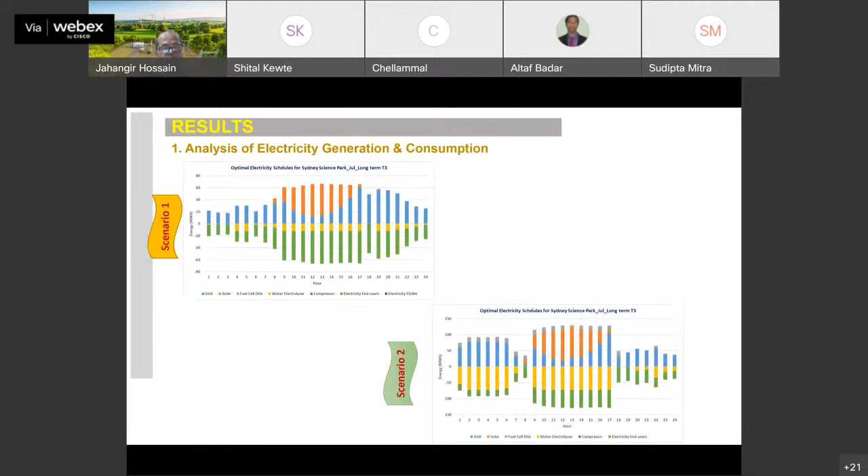We found, as I said, that we simulated two scenarios for three different terms, and we calculated the hourly demand, usage, and storage, with all results shown here. As I said, I have already given you the slide, so these are some numbers. When you have time, you can read it.

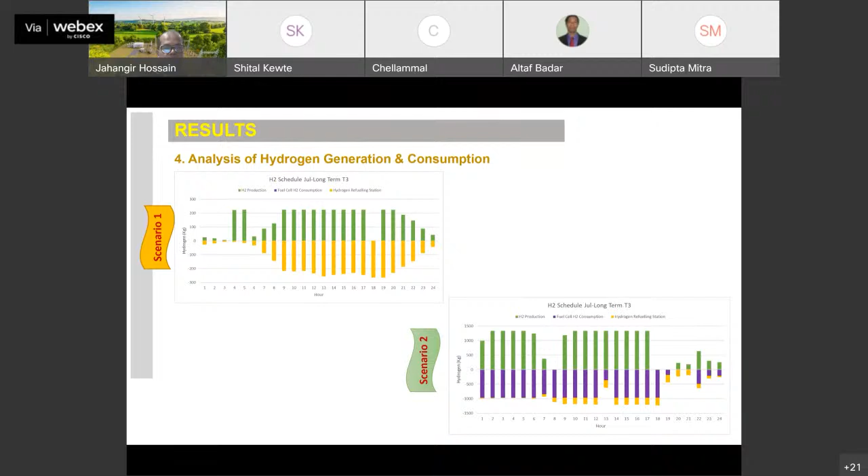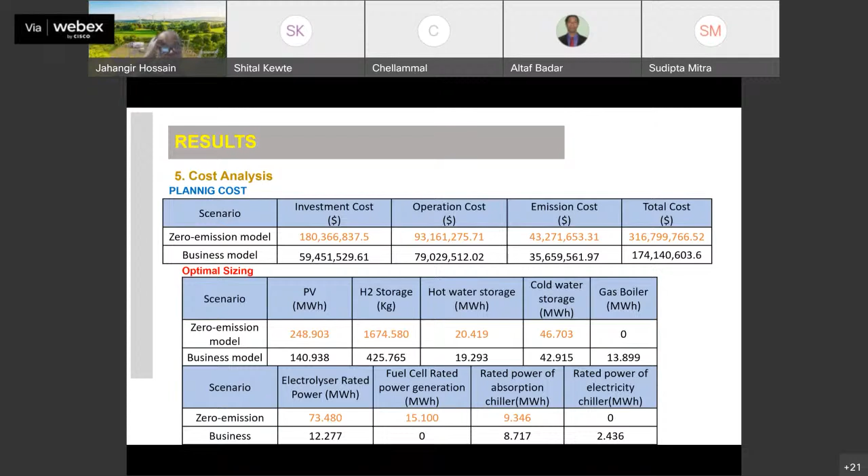Even in your case, if you would like to have a hydrogen hub in any part of India, they will definitely do a feasibility study first, and these are concepts you can probably utilize to do that. Finally, we came up with cost for investment, operation, and maintenance for different technologies, like PV, electrolyzer, storage, and different applications like hot and cold storage, and so on.

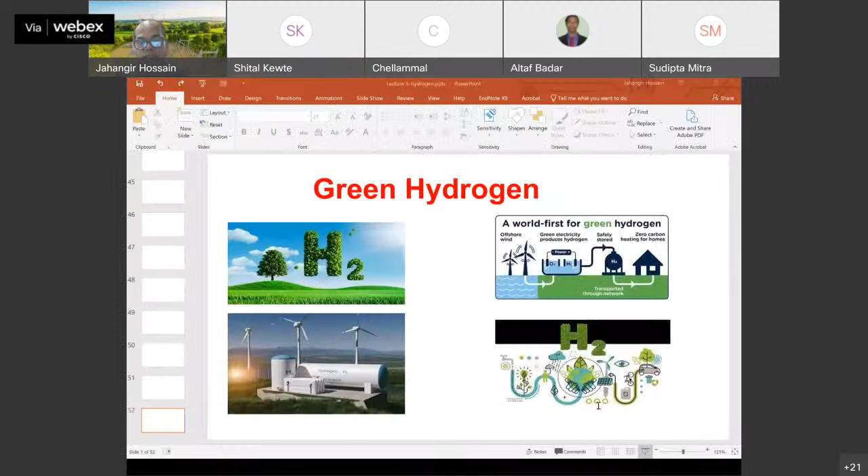So that's all I would like to share. Sorry, I've gone a few minutes over time. But if you have any questions and comments, feel free to share.

Do we have any questions? Do you have any final question or comments?

Okay, if not, I think this has given you at least some understanding and some idea about the current as well as future challenges, opportunities, and some of the research problems you can think about if you would like to work in the hydrogen area.

Anyway, if you don't have any questions today, I already mentioned to Altaf that for the next 3 days, tomorrow, we'll initially talk about something slightly different, because so far we've only focused on the generation side. We haven't talked about the customer as well as the market side with the new technology that's coming. We'll have one presentation on that, and then the rest of the time I'll be talking about another potential technology, microgrids, which you already heard about.